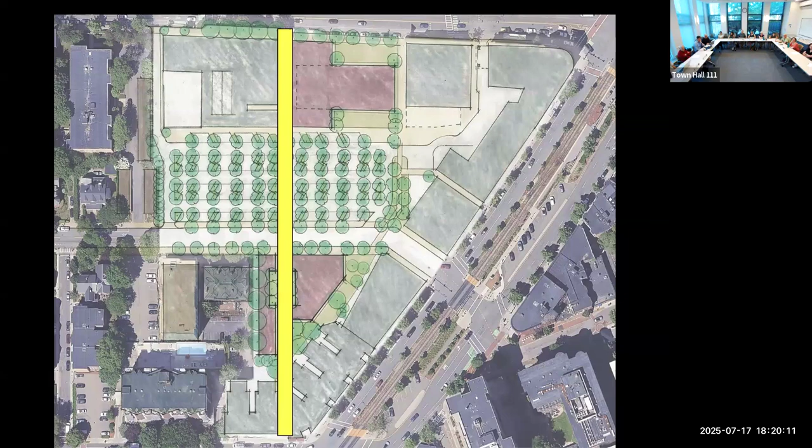So this lot essentially replaces the parking that's in it and across the street. So it maintains this axis that we discussed through the slot between the Maruichi and the dog walkers building. As I said, it aligns that with housing on both sides, creating a bit of a court by tucking back.

This is imagined as row houses, and this is imagined as an apartment house. And it could be 3 stories, 2 stories. There's great examples, a project I was remotely involved in, Daybreak in South Jordan, has this quite tall mews on one side. Another part of the project has 1.5-story buildings.

These look like some of the carriage houses you see on Pleasant Street. Or you could do a 2-story solution, but the idea of a very narrow space that's lined by buildings that aren't that tall, kind of want to go for that 1-to-1 ratio, is very nice.

First, Shannon. Okay, so maybe you didn't get to it yet, but it's in my mind - where's the preservation of farmers market space? Of what? Farmers market. So the farmer's market would take place in the parking lot. In which? Any part of this main parking lot, where it was desired. Okay, and then how would that space be demarcated?

And so I guess what I'm wondering is, would that access be dividing it, so one half is farmer's market and the other half is parking? Well, let's just say that the farmer's market right now is taking place down here, right? It uses that full lot, and is actually supposed to use some public space that has been taken away. And by the way, our schemes imagine reclaiming at least some of the beer garden from Hamilton.

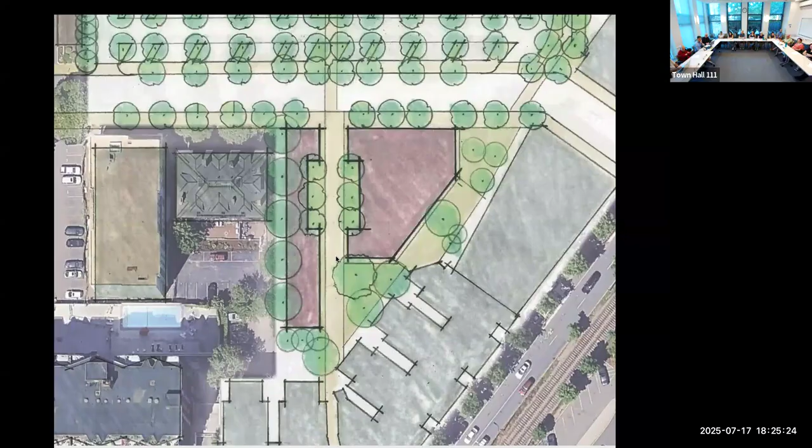Marion: I'm wondering about walking, what happened to the path by the trees at the William Street end of the lot? There doesn't seem to be a path there anymore in the main lot. There isn't really a path there now either - you kind of have to walk on the curb.

No, there is a sidewalk. You can walk up Center Street and take a left and there is a sidewalk that ends, and you can cross over and there's a sidewalk by Zaftigs, by the back. It's not ADA accessible, it doesn't have curb cuts, it narrows, but it is a sidewalk and 3/4 of it lets you walk outside of traffic. That hasn't been changed.

Also note that we really haven't proposed much change for down in this area. We'd love to see this archway put to some use and we hope that can stay in play. But it's fairly out of sight, out of mind over here, and the way people park in backs along that edge, which is hard to change because it's private property, makes it a little bit difficult.

The other thing I want to say is that this scheme does widen both of these flanking sidewalks, so there's enough room to add the additional half alley, half parking, some of which is for service. This sidewalk, which has trees right in the middle of it, would get another 6 feet inboard from the trees, so your normal condition of trees protecting pedestrians from the street. Then this sidewalk, which has no trees, gets an additional 6 feet that could actually hold trees. That's another feature of this scheme.

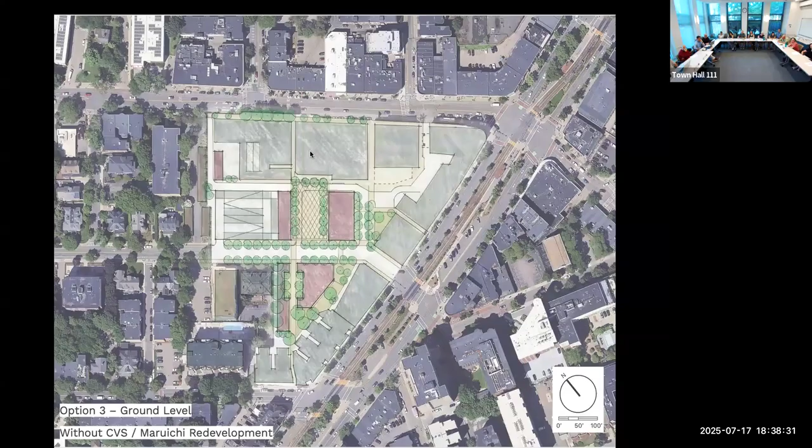This lot solves those problems and only introduces one other problem, so ignore that. What you see here is a deck that's a bit smaller, and I'll let Ben chime in with the statistics on this deck. This deck is accessed from Center Street, and it ramps up and up and up and around. You have a smaller plaza, but one that hopefully is large enough for the farmer's market.

But if it's not, that's okay, because all the parking is happening here, so it can spill out, presuming deliveries are coordinated into these buildings, into this larger area as well, since there's no longer any parking demand in this area — it's all happening in the lot. That allows us to develop this site too and park these buildings. You have one new large double-loaded corridor residential building here, likely with retail on the ground floor. You have a thin lot liner hiding this parking deck, and you have the same residential scheme here to the west. Ben, do you want to chime in with some numbers on the parking?

Yes, so you'll notice that this garage has a footprint that's a bit smaller than the previous option. A typical height here will provide about 150% of the spots that are there today — so replace everything that's there and then half again for new spots to support parking need and some of this development that's being shown. Those spots would then be available to these housing units, which could be more market rate and potentially have parking adjacent to them.

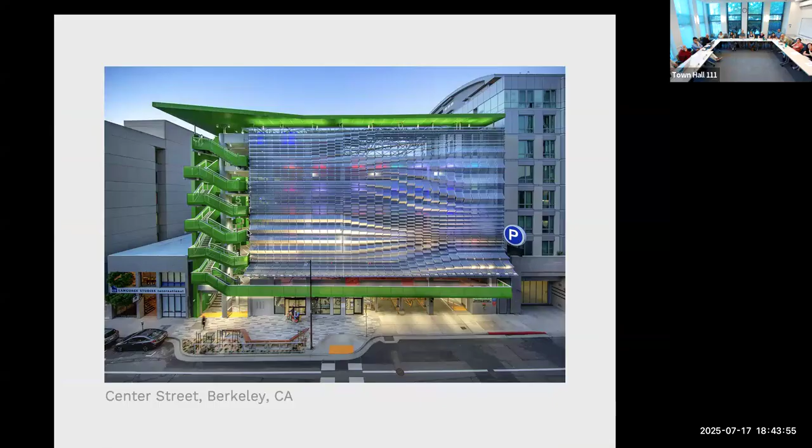This is one example. Mayor Riley in Charleston, who I mentioned before, tells a story about how when he put this garage on East Bay Street in Charleston, the architect came to him and said, using car language, it looked like a parking deck, and said 'This is what we want to build.' He said, 'I don't like that—can't you make it look like it's inhabited?' The architect said, 'Well, in school I learned that form follows function.' And the mayor said, 'Yeah, I learned that too. It's just, we're not going to do that in Charleston.'

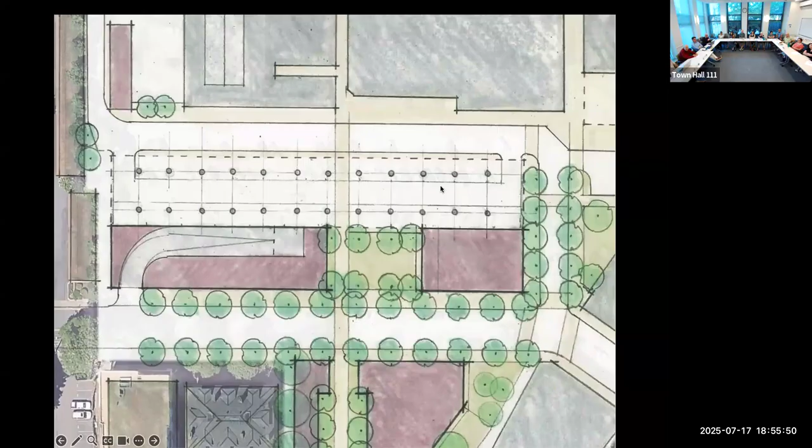One of the strengths of this scheme is that it's only one bay wide. The speed ramp works so that at ground level, when there's no farmer's market, this is more parking. I'd like it paved nicely, not just asphalt. You enter here, and it's a double-loaded, normal parking bay where you can park on either side, like any one-bay-thick parking lot. Upstairs is basically the same configuration.

There's inspiration from Paul Rudolph in New Haven, though I think this is a little more clunky and heroic than I'd have in mind. My favorite similar scheme, barely published, is by our friends at Utile—I don't know if you know Tim Love, who's a wonderful designer.

This proposal was done for the Build a Better Burb competition. These are precast arches—this one was cast in place, quite expensive—that you can place in two directions, and when combined create a wonderful underneath space. In our case it would only be one bay wide, so there'd be a lot of light coming in from either side. What you're seeing here is multiple bays wide.

But this is the experience at the ground level. Up above, you have the deck floating, lined by housing in this direction. You still have the full service lane coming around the back. It's still one continuous social space, and the farmer's market gets a roof.

How does that compare in number of spots to the first one, or what's currently there? Ben, how many spaces—this is 5 or 6 stories. This is very similar to the side lot scheme—again, about 150% of the spaces that are there today in both lots. So if this is done right, it could be a real icon for Brookline.

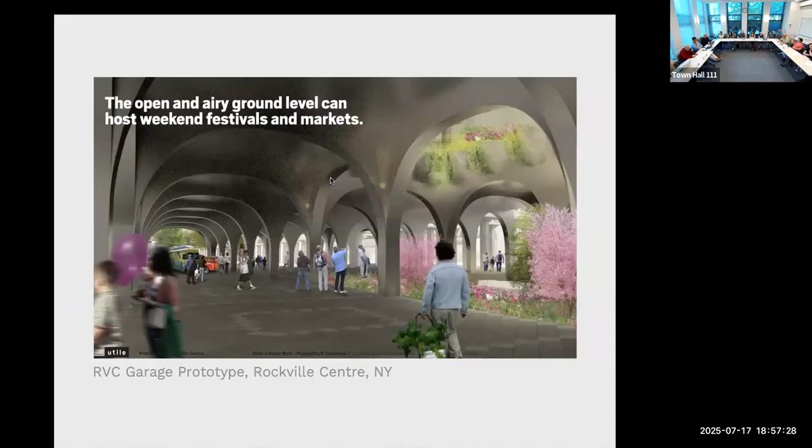I have one other question—can you go back to the sketch? I'm noticing there's no widening of the sidewalks along the parking side of those buildings. Those are wider—we've added 6 feet to the sidewalks.

But no trees, or does that picture just not have trees? They're missing from the picture. We'd want them—in fact, Ben, a note is that when we widen that sidewalk, we need to show the trees lining it, because visually that affects the read of it. You're totally right, and in fact one of the things we discussed was that if you add 6 feet to that sidewalk, you can have a continuous row of trees up against the building.

I noticed in one of the other sketches, the Rockville Centre one, there was talk about being able to close it off for other things as well. I imagine that's something that could be part of this scheme—like it could be more parking when needed, but also other uses. Well, what's great is the speed ramp to upstairs will always be there, so you'll have 4 to 5 stories of parking no matter what, plus 1 story in addition you can use for other things.

So that's this scheme. And then finally, take out your wallets, ladies and gentlemen—Option 5, the underground. If we could build bigger buildings, if money was no object, we would dig.

We'd dig down probably 2 stories. What you see here is a ramp entered from Center Street—you rotate down 1 story and get 2 bays of parking, rotate another story and get 2 more bays of parking. You have a tunnel under Center Street, and underneath the building located on this side of the pedestrian walk, you have even more parking.

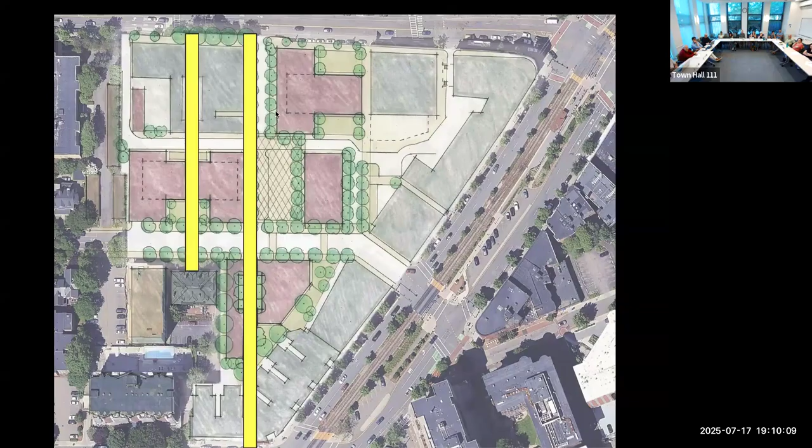One is the access through the arcade becoming an archway through the building, and the other is the opportunity for two taller pieces of building, one here and one there, which indicates preserving that access that already exists, adding the access through the arcade, through the building, and then imagining some sort of archway through the building, bigger, smaller, huge.

You all know Rowes Wharf. Maybe it was something more like this, but again, we presented this scheme with the expectation that it would be rejected. Well, do we really know that no developer would be interested in sinking the money into something like that, if they can have a nice outcome?

That I think would pencil out for a developer probably. Two levels of underground parking happens all the time. We did a 79 unit condo building in Brighton with 2 levels of underground parking. The bigger concern is that that's a much longer project, and you're in close quarters, and if you're digging down, it just gets more complicated on how you park everybody in the inside.

Digging, you don't know what's down there. It would pretty much obliterate your parking supply while it was happening. And you don't know what impact it would have on local businesses and the ledge. At this point, you don't know anything. You really don't even know what's possible. Any developer, before they close on it, would require exploratory borings and stuff like that.

That work would take time, and to me, the concern is that this has the most upside for a developer if it pencils out, but it's the most intrusive to the neighborhood.

Yeah, this one would require a longer term alternative, and we also have to be sensitive of the businesses that are currently there. We can't disrupt their lives because we're gonna lose business, and then Coolidge Corner won't have anything. So you've got to weigh it out to see what is realistic, not only money and time, but in terms of their lives and their livelihoods. We don't want to turn people away. And that's why I think the underground is much more disruptive to those businesses than above ground.

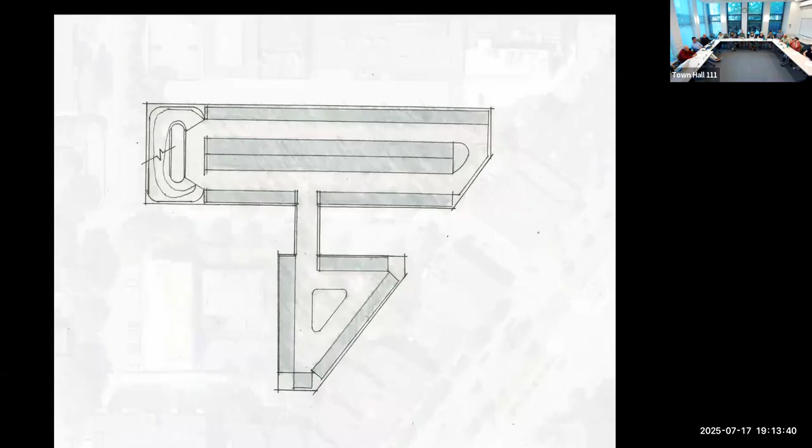Yes, you would have to do the east lot first. I just want to highlight something that I think Marion raised at our last meeting, which is even if it's not actual, there's a perceived safety concern with underground parking. I think that was you, Marion. Yeah, that was me. I'm sorry, Marion, I'm not taking credit but Mary concurred. People feel less safe in the dingy basement part. All right, sorry Mike, you get the credit.

So I want to summarize, if I may, just because we are basically done. We do have a little chart that compares each option. Here's all the options. Option 1 is the Grove. Option 2 is the rejected impossible center lot. Option 3 is the side lot. Option 4 is the floating lot. And option 5 is the big dig. So here they are compared.

So we looked at 8 different criteria. We want a scheme that adds parking. We want a scheme that upgrades the farmer's market. We want a scheme that allows new development, particularly housing. We want more green space. We don't want to redevelop the CVS and the Maruichi. We want to not expose parking to Center Street.

And we want to create a continuous public realm through the different parts of the neighborhood. And then finally, we want it to be affordable.

So if you look at these 8 criteria across the 5 options, in terms of adding additional parking, the Grove does not. It's a little bit less parking than both lots together. Well, that's the point I wanted to make about mixing and matching, because if you don't put housing here, leave that lot.

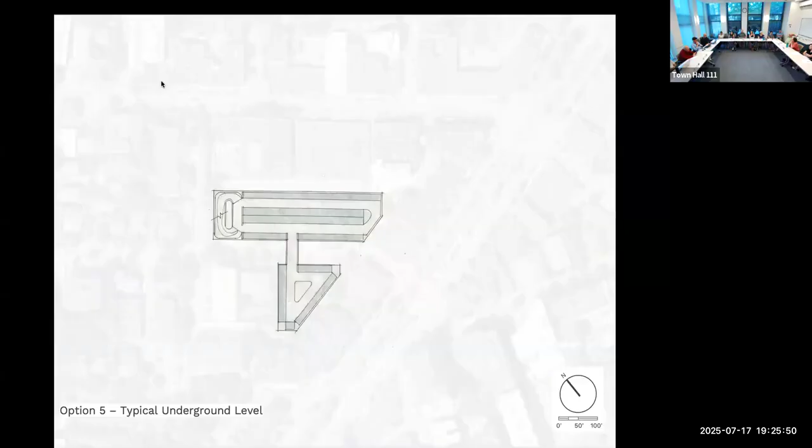My question was, what will be the maximum acceptable number of parking spots that can be accommodated in that spot? Maybe not all the necessary parking can be accommodated there, but maybe together with a lot on the other side of Harvard, and with a smaller lot, not 10 stories but maybe only 5 or 6 stories, the west lot can provide the necessary parking while the east lot is being redeveloped.

I'm really not understanding why you would want to build a garage on the west lot that presumably would take as much time as it would take to build the garage on the east lot, and displace the same number of parking spots. So I'm just not understanding why we would do that.

The issue is Moshe is concerned that there isn't a place to replace, even temporarily, the east lot. Moshe, I'm looking at a Google satellite view of the empty space now that's behind the Booksmith, and it's differently shaped, but it would be pretty close to a replacement, I think.

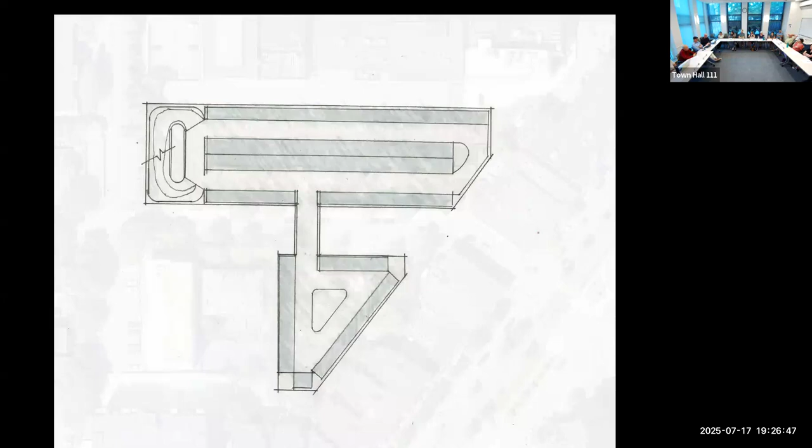I think we also need to keep in mind the parking study - just thinking of the Marriott garage. Yeah, I went in there on Saturday and there was over 100 parking spaces empty.

People need to be aware that this is an option, and I don't think they are - it's a little further away, but also the town could maybe just have a deal with the Marriott during construction. We give them some amount of money for some number of spots that are town rate instead. I haven't - they're not allowed to charge more than town rate, for the 2 hours, yeah.

I've been told from some businesses on Beacon Street that their customers, and this is during the week, have been told that they don't have parking spaces for public at the Marriott. Yeah, the Marriott makes everything very difficult. People never know about the park behind it or anything, they really don't like it.

Well, that's a different issue. We have a formal agreement that says we can park there - publicize that. No, I tried to read the formal agreement today, but that doesn't help the random customer who thinks they can. I meant, can that go - okay, hold on, hold on, hold on - they're gonna acknowledge the town that this is available, if Marriott's not doing it themselves. Guys, Mike needs his gavel. Yeah, I don't normally need a gavel for these meetings.

So let's go one at a time. I think we're trying to solve too many problems. Our task is to say, well, which of these things do we want to rule out? And so option 2 obviously falls out. And the question is, as you think about it, does option 1 - I think everybody would say, well yeah, we kind of have to say that we include that.

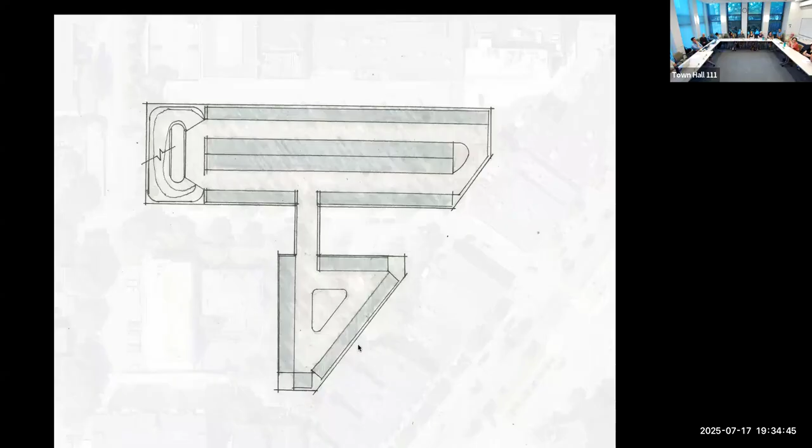Are you gonna allow them to charge for the parking they're putting in? I think the town's preference is no, so that needs to be offset somehow with other incentives. It's a big math problem. Something's gonna have to give somewhere.

Politically, it's not favorable to say we're gonna go 10 stories high. It's also not favorable to increase the cost of parking. One of those things is gonna have to give, and it's a question of everybody's priorities. If it's keeping parking the same cost, then maybe it's an 18% affordable project, not 50%, or it can be 10 stories instead of 4, or some compromise somewhere.

Brooke, with the side lot, would it ever make sense for a developer to go up and down - do some parking underground they could rent monthly for overnight, and above ground would be town municipal? Underground is more expensive to build than above ground, but I don't think two layers of parking on their own justify the cost. And if you have municipal parking there, I don't know if there's enough demand for that as an isolated use.

Well, if you think of all the people paying for parking in Brookline, paying like $200 a spot a month - they'd be able to rent out spots underground, privately. Like people visiting Coolidge Corner versus people renting spots, where they'd go down and need a permit.

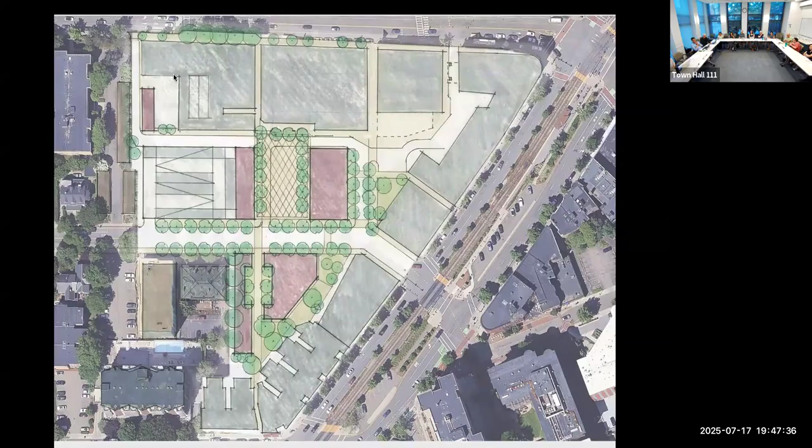Can I ask that? I did a lot of stuff with underground parking many years ago, like at Post Office Square. When you have that, you have huge buildings around it, and that actually, at the time I was working with them, wasn't working - it wasn't making a whole lot of money. I don't know if the economics are the same, but I assume that if we look at underground parking, even a little bit, it's gonna end up with large buildings. We're gonna need much more structure around it, and I don't see that happening in town. So I'm wondering whether it's worth spending time on that option for that reason. I understand what you were saying about... that was my initial take on it too, that it's not gonna be favorable. It's disruptive, definitely the most extreme of the options, and whether we think that has a shot at getting through or not.

My question is, I guess to you, or maybe somebody in the planning department, if this isn't an option - and I understand, I was on the Coolidge Corner District Planning Council 15 years ago when everybody wanted Post Office Square, and we went through the same thing - if there's a way to do some quick drawings to show what the impacts are of doing something underground, so people see what it means to do that. Just simple sketches, not full-on 3D, without doing the full-on study of it.

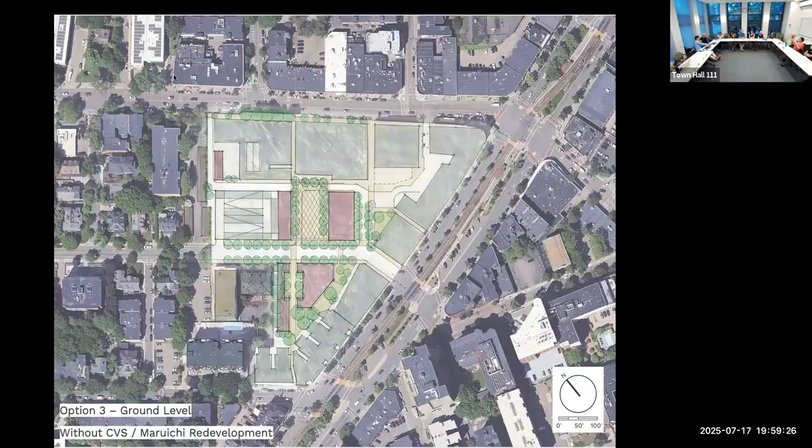You can just say, well, what's 200 times 150,000? Well, no, I'm telling you, you can't. Even if we don't need the 3D visualization from every angle, we need something with your stamp on it, not me doing the math. We need something that says spec density looked into this, and in order to offset the cost, a developer would want to go this many stories up, even with this kind of setback and this lovely 4th floor balcony, and this is what it would look like on Center Street.

Is that what you want?

We've been talking about it as if the underground parking is physically under all these buildings, part of the development project. But if we're talking about options 3 and 4, where there's a separate side lot and the town is paying up to $15 million for that, and a developer is building buildings separately, there's nothing that says if you go underground, the town can't contribute to the cost since it's gonna be town parking. It's a split of dollars that actually makes sense for the project. There are too many variables at this point for us to conclusively speak to the finances of any of these options.

I think we go back to, option 1 we don't really need to do more visualization on, option 2 is out, so we're left with 3, 4, 5 — 3 options to look at.

I pulled up the timeline and next steps slide because this is not the only narrowing down this committee is gonna have to do. There's some sense in what Shanna is saying, which is if you move ahead with 3, 4, 5, even if we don't think 5 is that viable, it provides a valuable political tool for the folks asking, what about underground? What about underground? And that's a good chunk of folks.

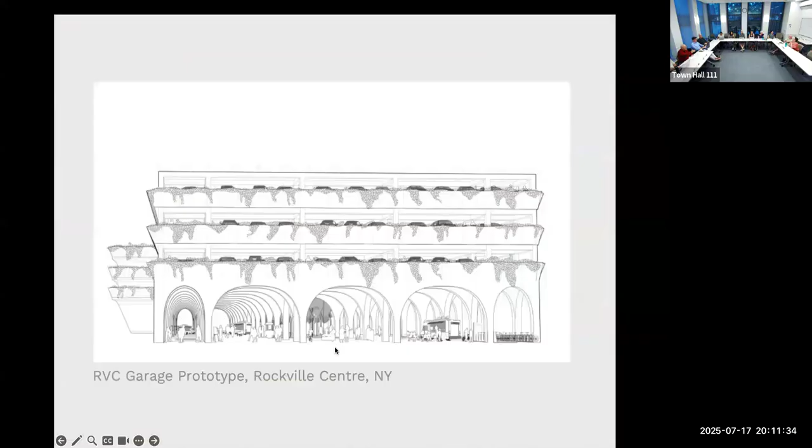Thank you for listening, thank you so much for being here. Unfortunately I'm gonna put that in there, but unfortunately you can't. I know I did, but thank you so much. I really appreciate you guys for coming. And then when we're trying to sell for the public, can we get you in on that? No guarantees, thank you very much.

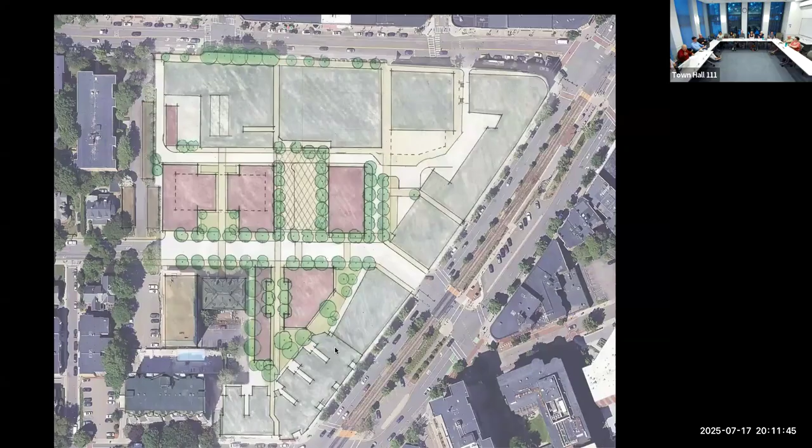Okay, so I'm just gonna go down, well I don't want to leave the folks online on Zoom out, so I'm just gonna have a list here. Sean: 3, 4, 5. Julia: 3, 4, 5.

I don't like any of the options. I think none of them is elaborated in terms of the staging. I think there is a great deal of uncertainty about the future. I think the East Lot is an important asset for the future of Brookline, and there's a great deal of uncertainty what the best thing to do with it is at this point. So I think whatever options are being considered should be considered in terms of staging - what happens first, what happens next, what can be done in 1 year, what can be done in 5 years, etc. So I'm not ready to select any of the options.